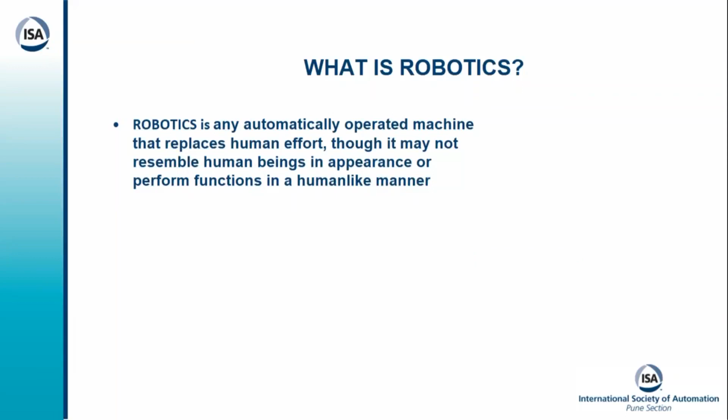All operations. So today's topic I have taken a list of agenda: what are robots and types of robots, and why the need and purpose comes in our manufacturing industry, logistic industry, healthcare industry - the robotics need is there. Where are the application areas where we are using this robot to improve our productivity and production, precision of applications, and upcoming trends in robotics. So these are the topics we are conducting today.

These are types of robots. These are articulated robots - these are 6-axis robots.

These robots have major applications in industry for welding lines, assembly lines, material handling equipment. You can see in major industries - automotive industry, Tata Motors, Mahindra's - big automotive, there is a line of chassis building. You can see this kind of articulated robots, which take care of the production, which replace human operations, welding operations, spot welding operations by these robots.

And we increase the productivity also. And these robots are continuously working with high speed precisely. There is no fatigue, no breakdowns, no delays in the process. So the articulated robots are the upcoming replacement of production lines completely.

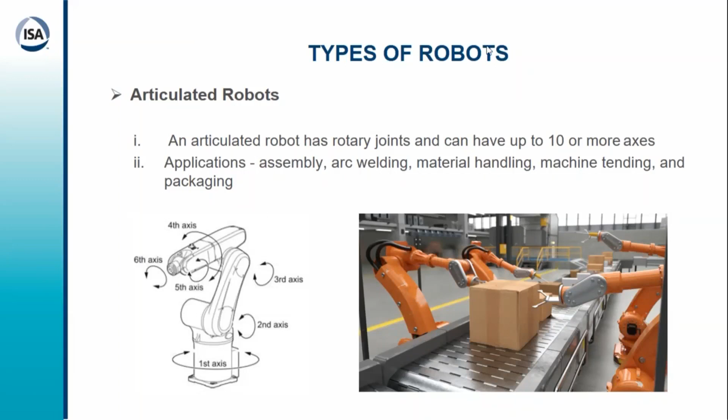So next is the SCARA robot. These are 4-axis robots. There are small applications with low payload capacity, with a radius of reach around 1 meter. So these kinds of SCARA robots are used in the industry.

These robots are very efficient for high speed applications with pick and place applications, glue dispensing applications, and deflashing operations of small plastic components. We have done many applications with these SCARA robots for deflashing operation and glue dispensing. This is cost effective also.

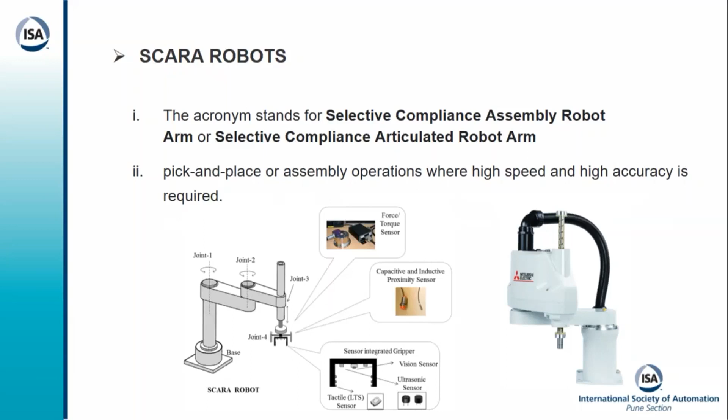Now the third robot version is the cobots. Cobots are collaborative robots - robots capable of learning multiple tasks. And these robots bring good features also. This robot has the feature that it can be operated simultaneously with operators.

In a production line, assembly line, you can place an operator and this cobot simultaneously. It has safety features also - if any obstruction or human intervention is there, it stops and no accident happens. So cobot is now preferred in the industry.

So where there is a need to operate a human also and the robot also, cobots are there, and these are an upcoming trend in the market. People are developing cobots - many industries are developing cobots and launching them in India's market. So definitely in future, in our production lines, you can see robots operating which are all cobots.

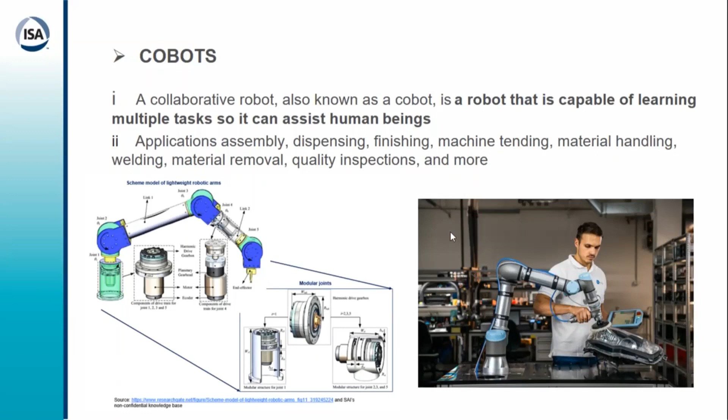Now the most advanced model in the market is AGVs, automated guided vehicles. Now you can see in any big logistic department or stores where people face challenges to find material, store it in racks, and then retrieve the material - huge stores are there just like Amazon. If you see in Amazon, you order any material and you get it within 2 days or 24 hours due to these AGVs only.

These are smart AGVs with automated tracking mechanisms, automated retrieval systems, automatic charging systems. So these are the AGVs in the market, which are very efficiently used in all logistic areas. These are the upcoming solution for logistic areas.

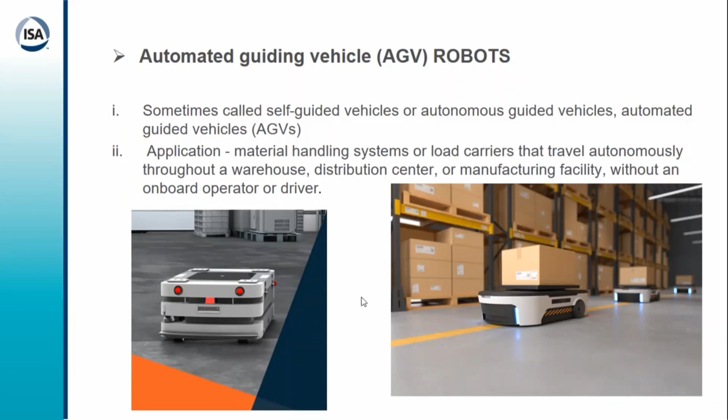These are the Delta robots. Delta robots consist of three arms with a servo system, which is basically used in pick and place kind of systems in food and pharma industry. These robots have high speed functionality.

It can have camera integration. With camera, it provides coordinates. With that coordinate, this Delta robot will pick up the material and place it inside the bins, racks, or pallets. So that is the functionality of these Delta robots.

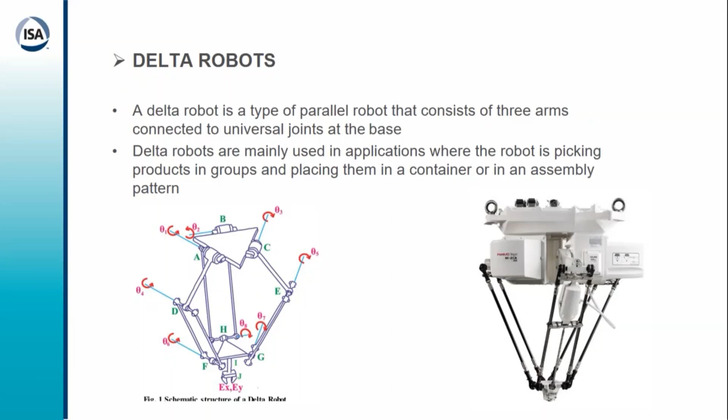So these are the robots, and now why are the robots needed? Definitely to improve the supply chain, manage shop floor complexity, and get data insight. We can get lots of data from the robots.

Definitely safety. In a conventional method, there are chances of accidents and many operators lose body parts. So with robots, we make more safer work conditions.

So robots are needed for quality too. With repetitive kind of work that robots can perform, human beings have limitations due to fatigue and body limitations. So robots are there for repetitive consistency and in conditions where a hazardous atmosphere is present, such as a welding atmosphere where fumes and dust are coming. Robots perform very well in this condition also.

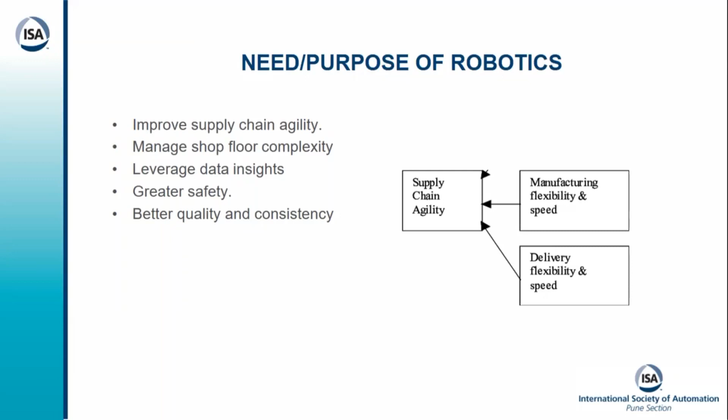So these are the purposes of robotic automation. These are the application areas found in any industry. Robots are doing production activity consistently 24 hours, such as chassis assembly lines, SPMs, and rotary assembly automations. These are the areas where robots are going to be used.

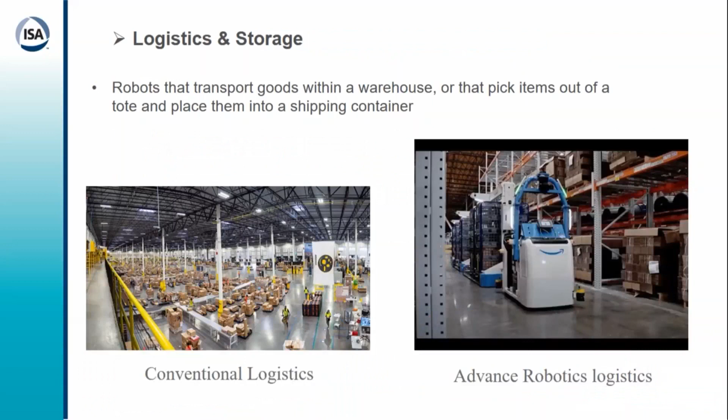In machining, there are areas where you have to do multiple operations, some welding operations and machining of any profile - there you can use the robots. Robots give good quality and ability to perform consistently. So these are the areas where we are using the machining process also.

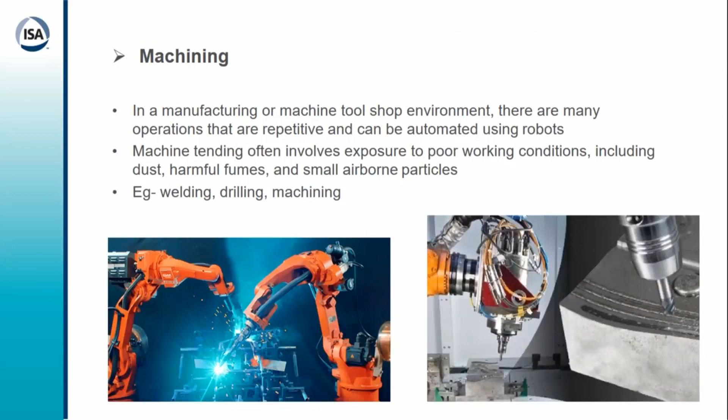Now the robots are coming into our day-to-day life. Robots are coming into our homes also. This generation is using robots for cleaning purposes too. These are smart robots which take care of your home and do the cleaning operation, cleaning furniture, shop floor, house. So this is an upcoming robot trend, and everyone will have this in our homes in the next 3 to 5 years.

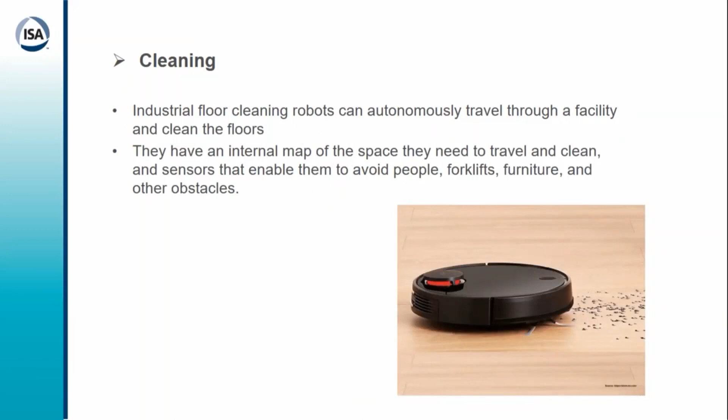Now the security system also. All defense industries are developing security robots with AI, artificial intelligence. These robots are used for security and defense in border areas, where they are automated to find any intervention of the enemies in our area. So these robots take care of that.

So this is an emerging trend. In future, we will not find our human soldiers on the boundary. This kind of soldier robot will take care of the complete boundary security system. So this is an upcoming trend in defense also.

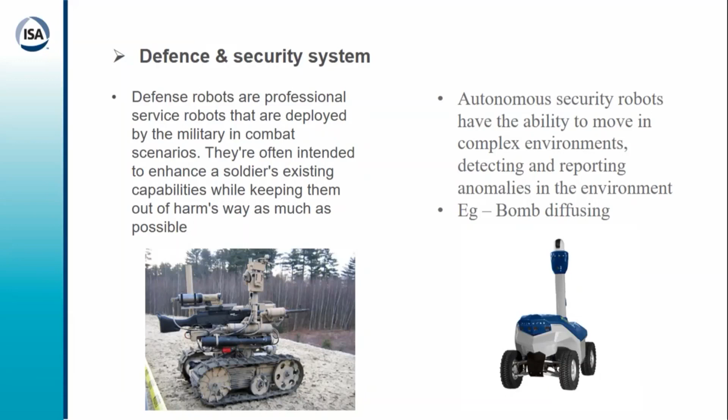Now the medical industry - in the medical industry, robotic surgery is going on. People sitting in the US are doing robotic operations using robot functionality. Doctors and experts sitting in other countries can do the operations. The medical industry is now majorly using these robots, surgical robots.

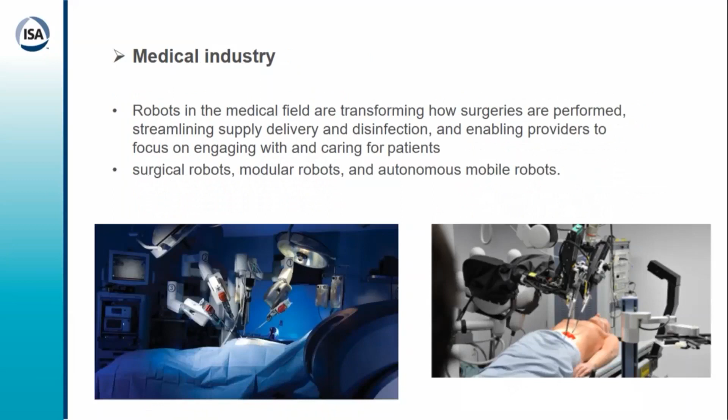One of the mythologies we all hear in Indian mythology is that Ravan comes and abducts Sita, taking the Pushpak Viman with Sita with him. That's the technology here - how this happened. But now we decode this technology, we come up with drones, the Pushpak Viman.

The same technology is now in this current situation. We decode this technology - at that time it was an imaginary thing, but now we decode this technology. With this kind of drone, we can carry people. In future, I think this can be used for ambulances also. If any serious patient is there in a road traffic condition, we can use this kind of drone which lifts the patient and travels to the hospital. So these are the future transport systems in drones.

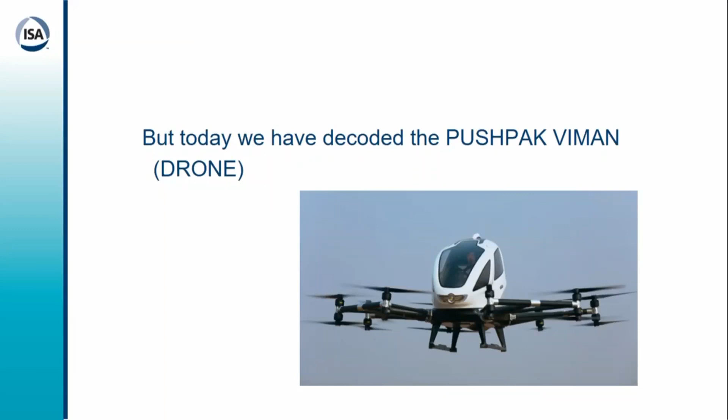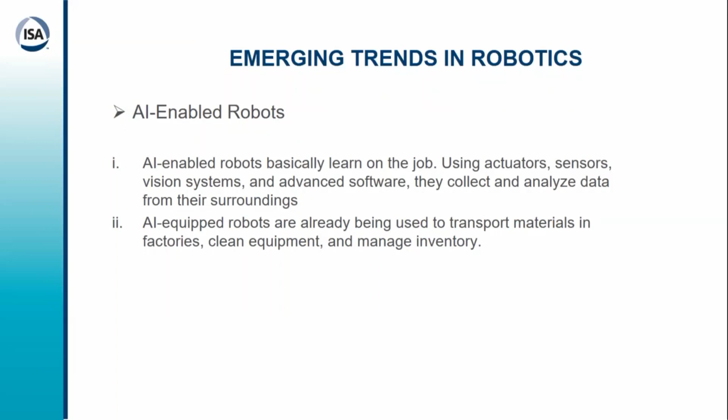Now an emerging trend in robotics is that all these robots are artificial intelligent robots. They collect the data themselves, analyze it, and take a decision also. The algorithm is designed such that on getting feedback - for example, in a machining center, if any offset is given by a machine, if an error is there, the robot understands that feedback and corrects itself to do the right operations. So that kind of AI system is inbuilt in these robots now.

Cloud - nowadays we are talking about IoTs. All the data is collected by the system and kept in the server data clouding system. So our data is recorded there. Based on that data, the system can collaboratively let the robot act on next further actions.

Self-healing robots are self-repaired. This is a new technology coming into the market. If robots have malfunctions or damages, they will have self-repairable capability. They are developing new robots which will be flexible, using fiber optic sensors, and they can repair themselves.

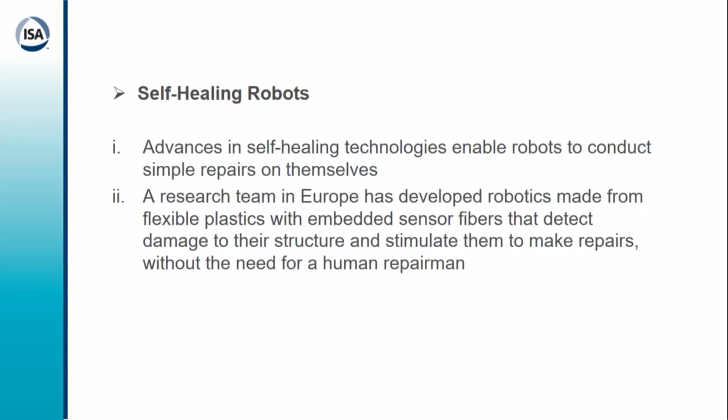These are the trends in robot technology. But my personal suggestion is that robots do everything in human life, but teaching and caring is difficult for robots. These are the limitations for robots, but they definitely take care of the human part completely. I will share some small videos where you can see how robot technology and AGVs are working.

Sandesh sir, any question in this? If any clarification is needed, I can discuss it. Maybe once you are done with the videos, we can open up the question and answer session. Right, right. So I will share one more video.

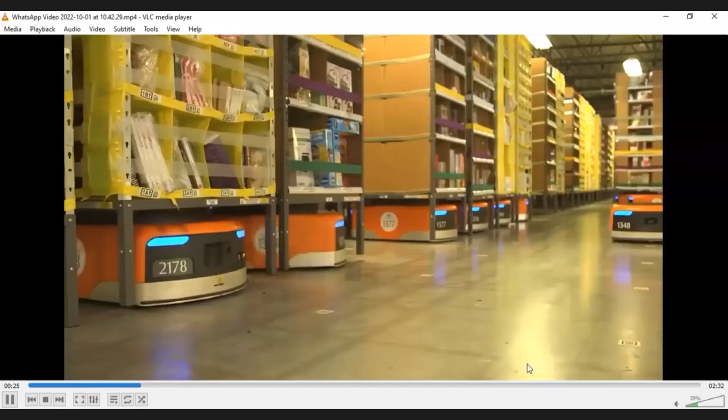This is a logistics area where companies are using AGVs to give fast delivery of material. This is an upcoming trend; many logistics companies will use this kind of AGV. It's more efficient, faster, and smarter. I am currently working with one company on AGV applications.

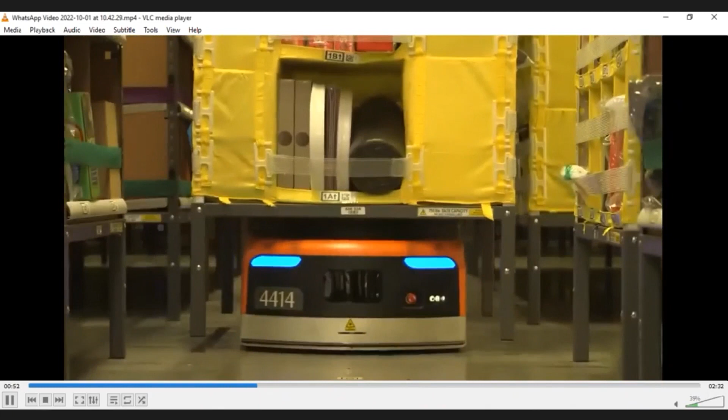They are so smart that they can go to the exact location, pick up the rack, and bring it to the exact point where delivery has to be given. After delivery, it extracts the material and goes back to its home position. After discharge, the AGV goes to the exact charging point location, self-charges, and starts functioning again. This is the future of the logistics industry.

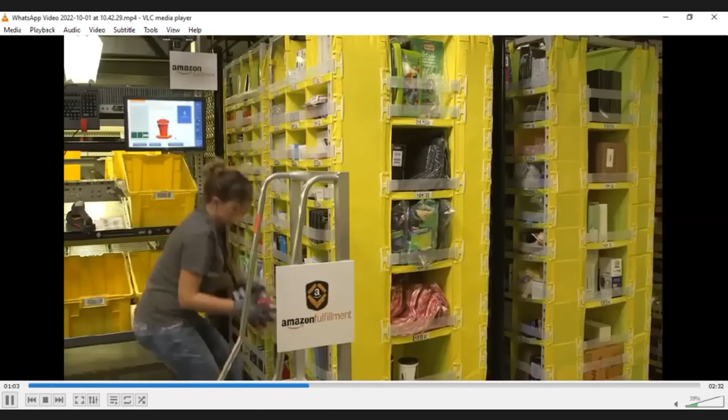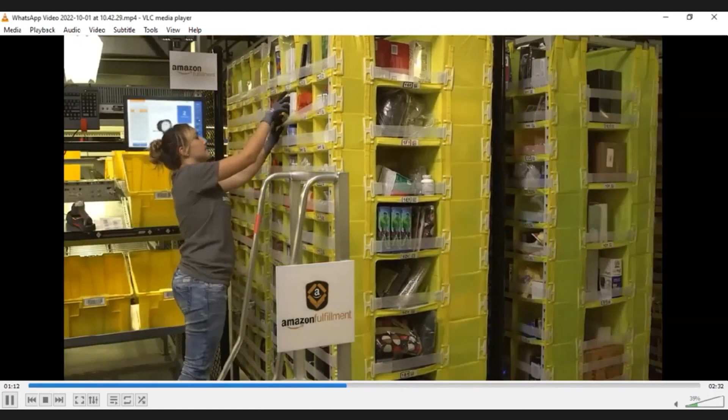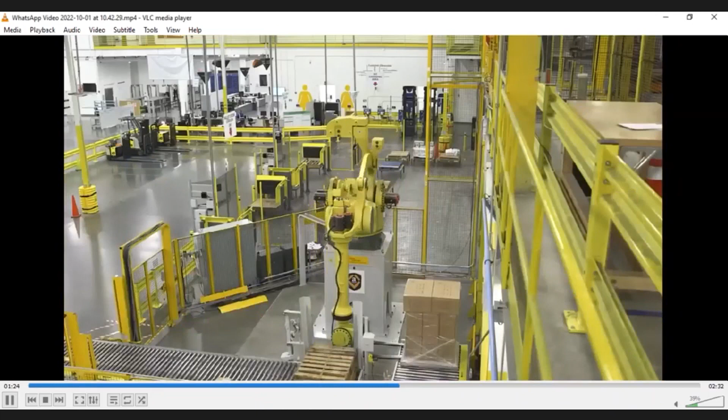By removing the material and pressing the OK button, it goes directly to the home location. In the future, you will see very few people working in the logistics area. All work will be done by robots, AGVs, and palletizing systems.

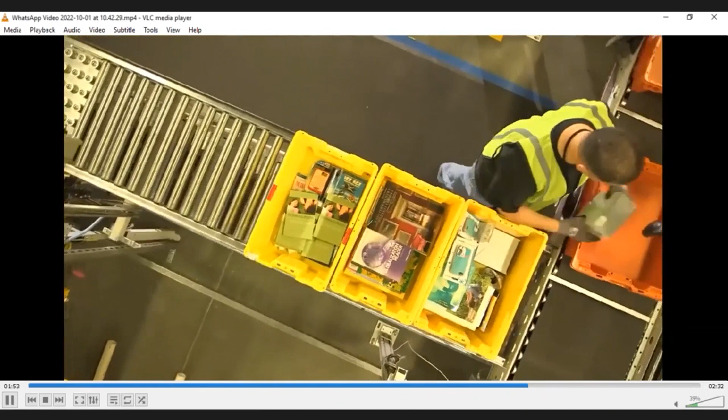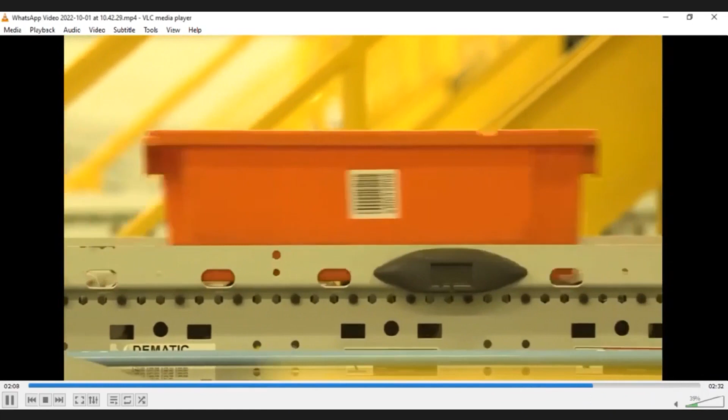They are so fast and so precise that you can get the right material in the right place at the right location. You can see the speed of this too. This is the upcoming trend.

Yes, actually one more video is there. So these are the technologies upcoming in logistics areas where we can be part of this industry in robotic automation. This is a small presentation from me regarding new trends in robotic automation, logistics, healthcare industry, and automation industry.